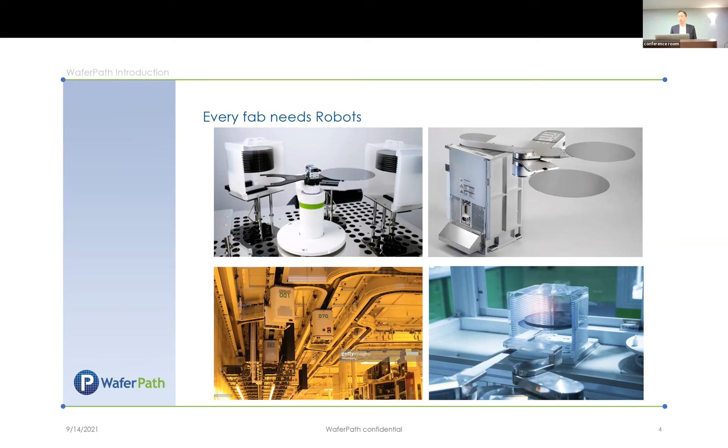This slide shows some automations that are commonly seen in semiconductor manufacturing facilities. Semiconductor manufacturing is getting more and more sophisticated, and most tools are equipped with some degree of automation. Some of them are robots. Robots basically move wafers from place A to place B, but they move a lot of wafers. The robots are extremely important for semiconductor manufacturing—simply put, without robots, we cannot make silicon chips.

So what are the issues? Well, the first big one is there are not enough tools, especially in the 200 millimeter space. Semiconductor manufacturers just cannot expand their capacity fast enough to keep up with market demand, and at the same time, manufacturers are quoting lead times we have not seen in the past 10 years.

So there are two categories of problems that WaferPath can address. In new fabs to be built, OEMs must provide tools compatible with those already in use. But the big challenge is where are you going to source the old components that were used to design tools 20 years ago? Our products eliminate that challenge by providing a solution that is compatible with the existing design.

The second category is that there are many tools running in existing fabs already, and those robots are at the end or beyond their useful life. Maintenance and service are becoming a big issue because many of the electronic components are obsolete. With the WaferPath compatible command language, our robots can provide a drop-in replacement of the previous robots.

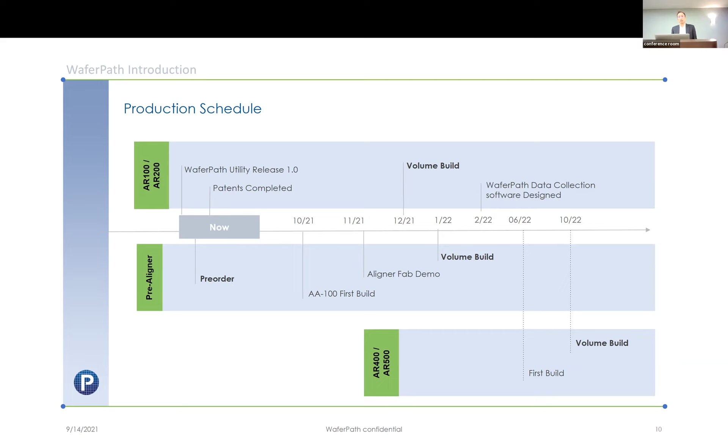So we have time for a couple of questions. Can we get on to, okay, yeah, so we have about 2 or 3 minutes. Okay, current customer status?

Current status on the customer front is quite exciting - we're already working with multiple OEM customers. The latest is that we have 2 OEM customer purchase orders on hand for pre-aligners to be delivered in November. One customer is pushing us for more aligners to be delivered in January. We also have an active design-in of a robot ongoing with another OEM customer.

For the customers on the fab side, we've been working with our alpha customer and beta customers, and the progress is looking very good. We are being careful to handle the customer engagement, because we need to raise capital so that we can build appropriate amounts of inventory.

For our inventory, in order for us to get ready for the production ramp - how much are you raising? We are trying to raise $4 million.

Is there a pre-money valuation on this? That's pre-money, with a valuation of 15. And it's actually going very well already, and we just started.

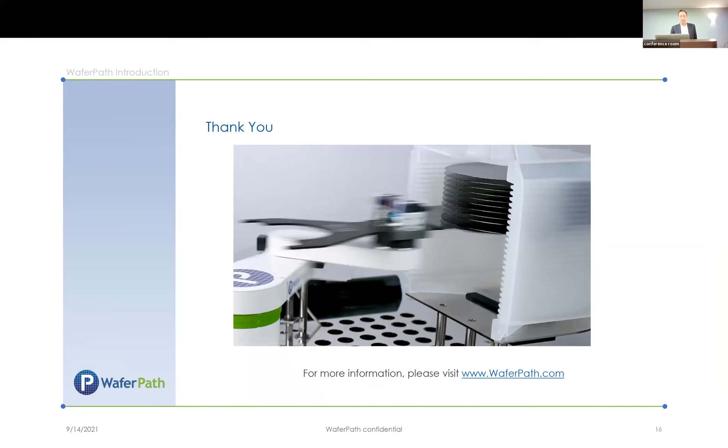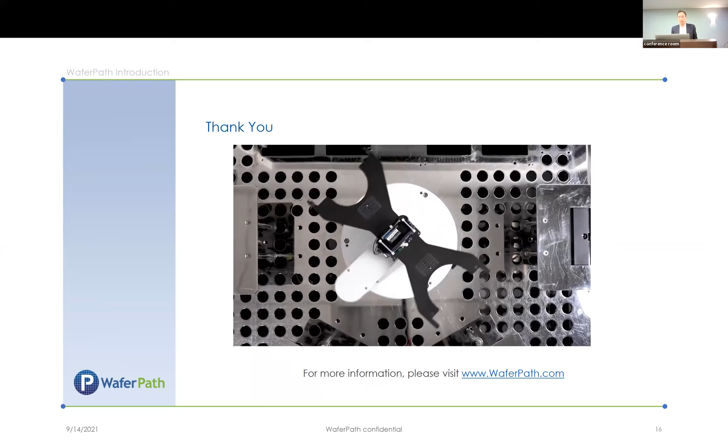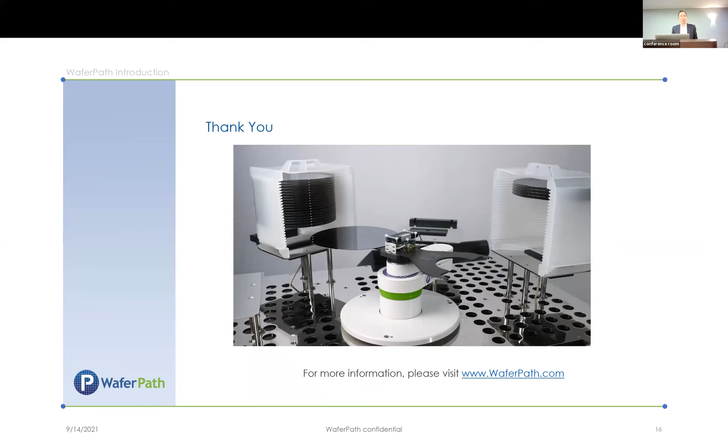Okay, got so one more minute. So based on what we are seeing now, the company is projecting a CAGR of about 80% over the next couple of years, from now until 2025. In 2025, we think we're going to do $20 million a year in terms of revenue, with a gross margin of probably 10 million.

And an operating margin of 4.5, like what Marty mentioned just a little bit earlier. And we are trying to raise 4 million for a valuation of 15.

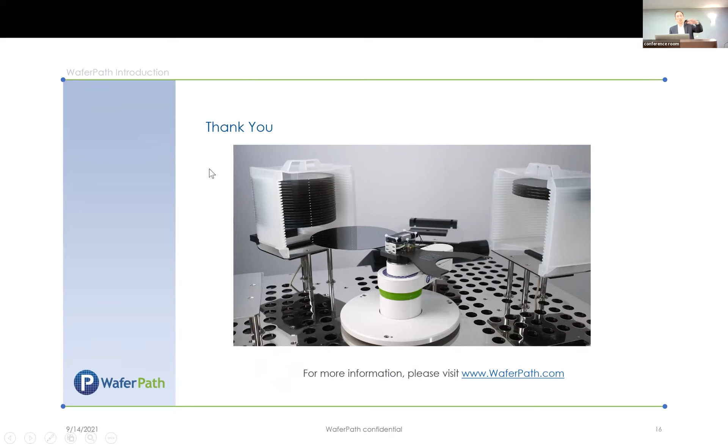And on the screen you are seeing, you probably saw that our robot was running. Basically this robot needs to move wafers from position 1 to position 2 for a lot of applications - almost anything where you need a robot to move wafers from position 1 to position 2. So the potential is great and the opportunity is great for us.

Fantastic, great job.